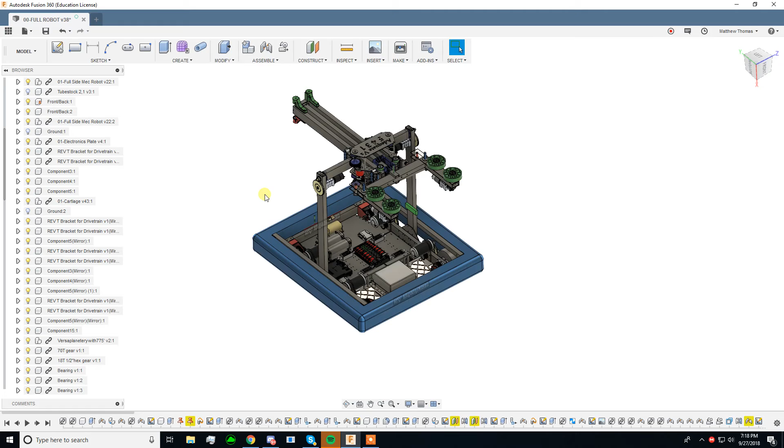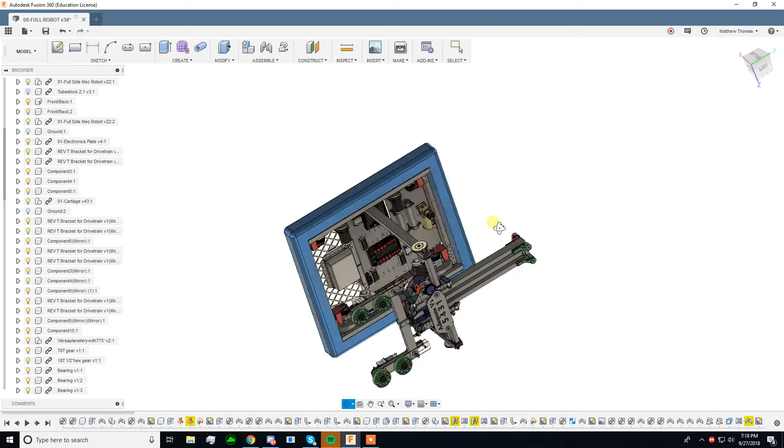This is another update video, a pretty big update video. Today is September 27th, 2018, and today we hit a milestone. Adequate V2 is officially done with build and electronics and was handed off to programming, I think like 45 minutes before the practice ended, something like that. Maybe it was less, I don't know. I'm bad at times. But today was a huge day.

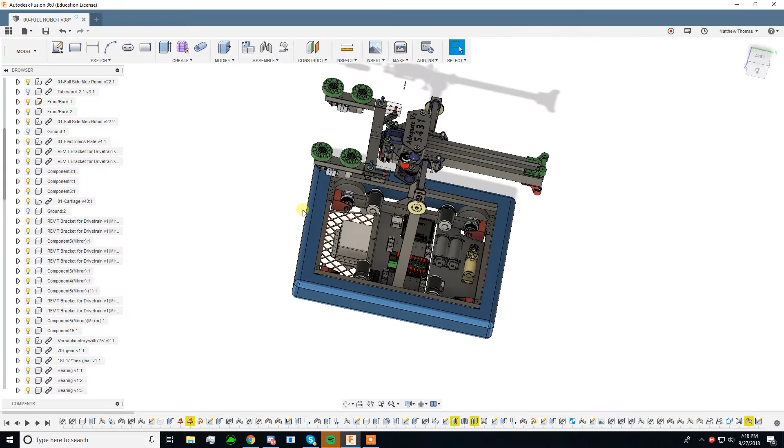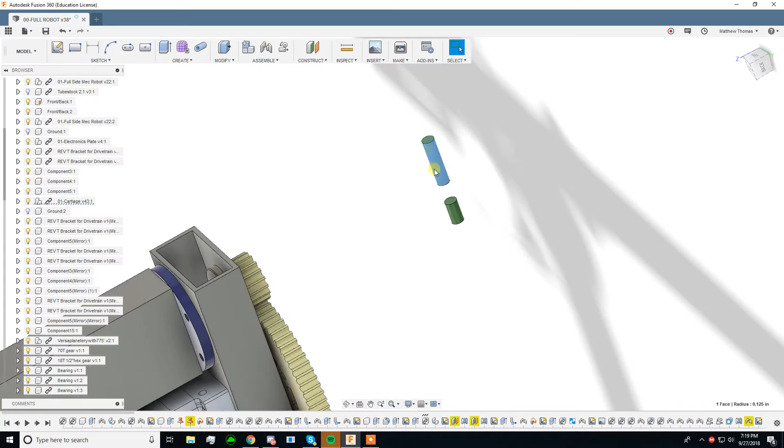Surprisingly, during the beginning of the actual practice, I thought we were being not very productive at all. But turns out I guess we were being a little bit productive. But we have the robot wired up. The wiring looks decent - I won't say it looks good, but it looks decent. In the time allotted, programming only got one of the motors to run. But it's a start, I guess.

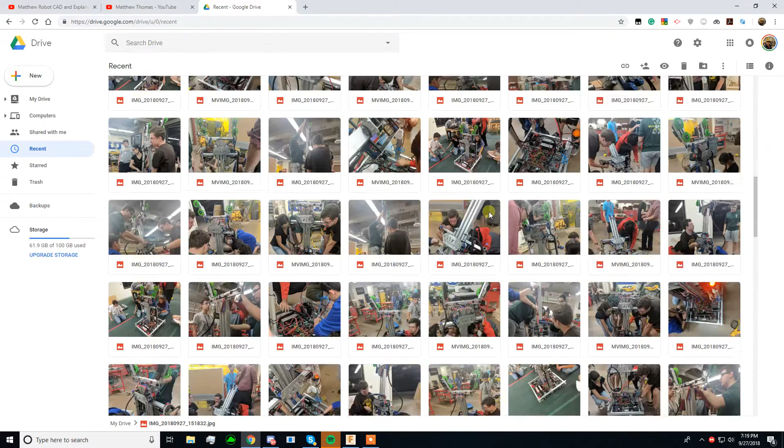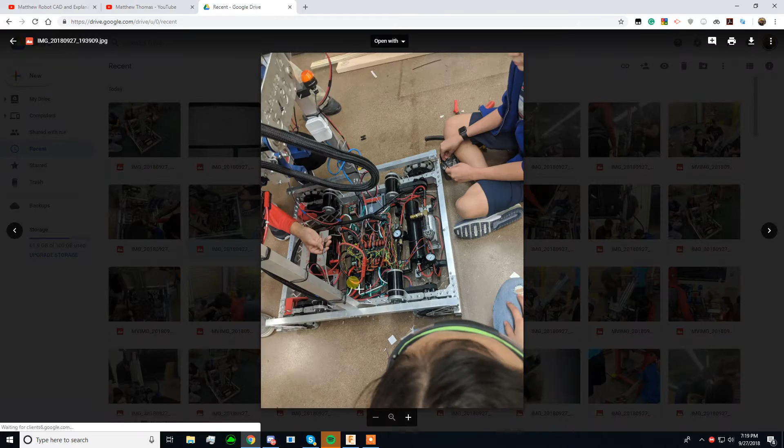Yeah, let's take a look at some of the pictures. Can't tell already, I'm pretty happy. Today was nice. So first thing we did when we got there is we drilled more holes for the battery panel, this panel right here. It didn't take that long. Then he used rivets to secure it in - that was really quick. Pretty nice.

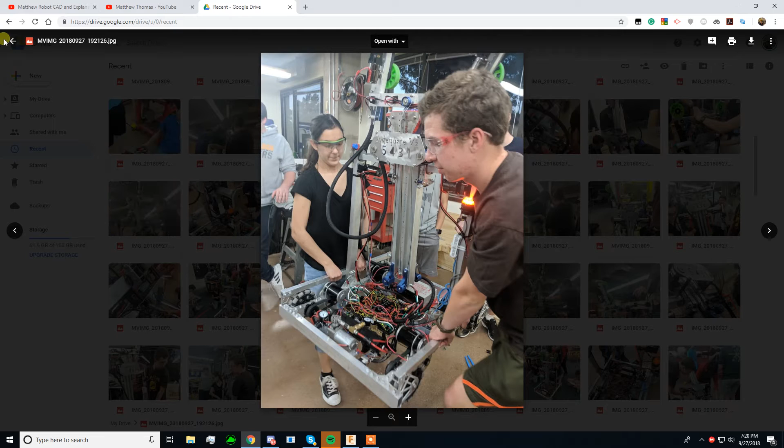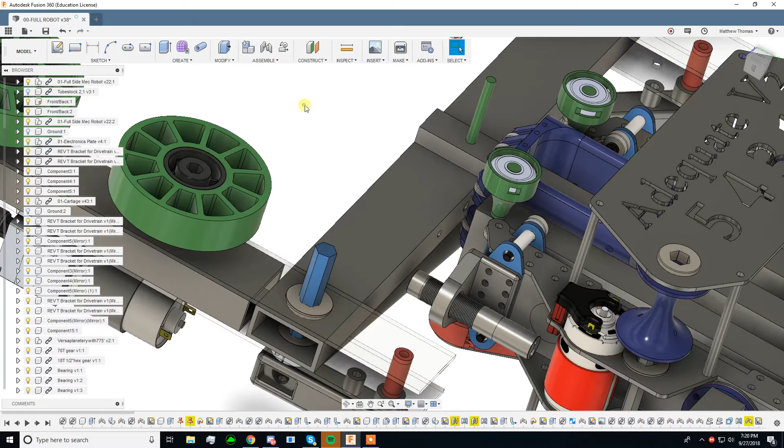After that, what did we do? Oh, the proximity switch - Natalia flipped it. I'm not sure if we have a good picture of that, but basically there it is. It's a switch that tells the elevator when it's down all the way, so we don't retract into itself and break everything. So that's pretty good that we have it on there. It's this thing right here, or this thing in the CAD. It was flipped the wrong direction, so we put that in the right direction, and we got that wired up. We haven't tested it yet, but it seems like it should work.

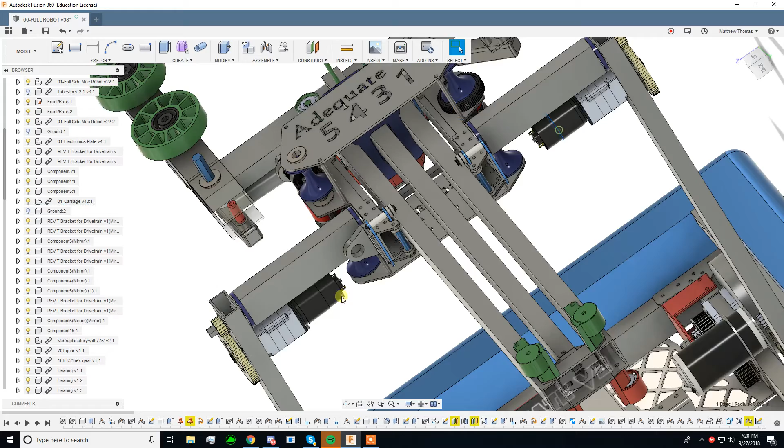Let's see what else we did. We installed the huge cable that needs to run this thing. We got the cables to run these two motors done. We have the cables to run these motors. We got everything wired in, including the pneumatics. Everything is wired - the wires probably still need some more cable management, but at least they're out of the drivetrain motors, which is the important thing.

Here's the actual robot on the field. I'm not sure if we got any pictures of it running - probably not because we only had one. Oh yeah, that's an interesting point - when the programmers launched it, only one of the motors was running. I'm pretty sure it's a programming or electrical issue, not a build issue. But the robot was still able to move, and it was able to move pretty fast. Imagine that - with one motor we can still run the robot. It won't be able to drive anywhere anytime fast, but that's surprising. So let's see what we can do.

Not sure, we basically, today was just all electronics. And electronics takes a while. You want to do it right instead of doing it fast, and that's what I think we did today. You can see the big cable right here.

I kind of like the solution we ended up with. I haven't seen it get caught yet in the testing that we did. I'm sure there's a better way to do it, but for now it seems pretty good.

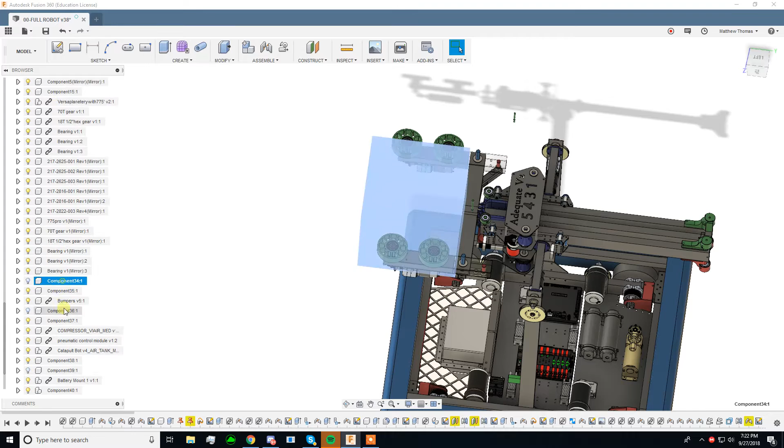I tested - and not saying that we would ever do this - but let me get my cube in here. There it is. So if we have a cube in the intake, what we can do is rotate like that, and not only in CAD but in real life, we can spin 360. We can go around and around and around and around.

And that would be possible, except we have these wires over here that are blocking us from doing that. So maybe after NTX, we could somehow figure out how to get the arm to rotate around and around with a cube. That would be super cool.

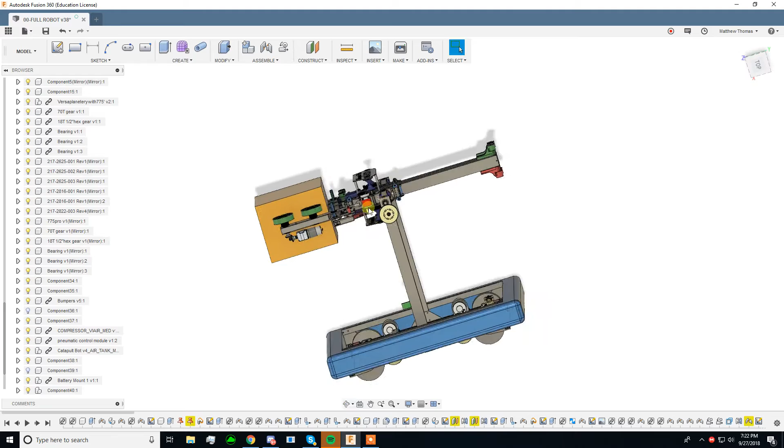So what we could do is go right here, take a block, go over here, then score the switch. Because right now we have to do here, and then we gotta flip all the way around to do that. It's not like that much difference, but actually that might even take longer for the switch, but it would be pretty cool.

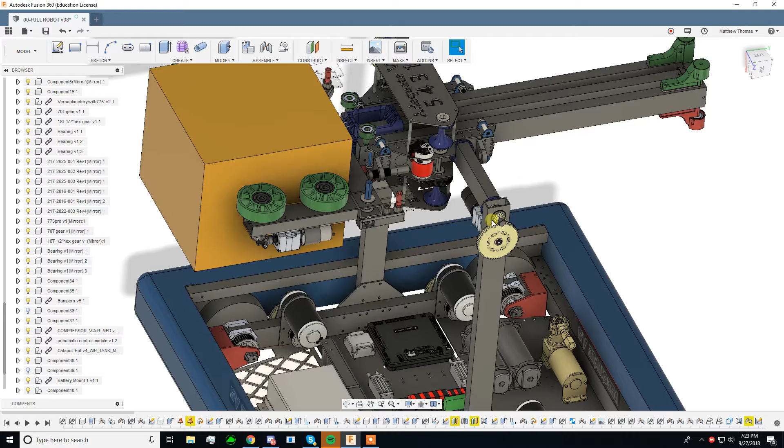But for that we need a slip ring and some other things, so it's probably not gonna be that much of a possibility. But yeah, I wanna spend this video also talking about how long it took to build a robot and these videos in general.

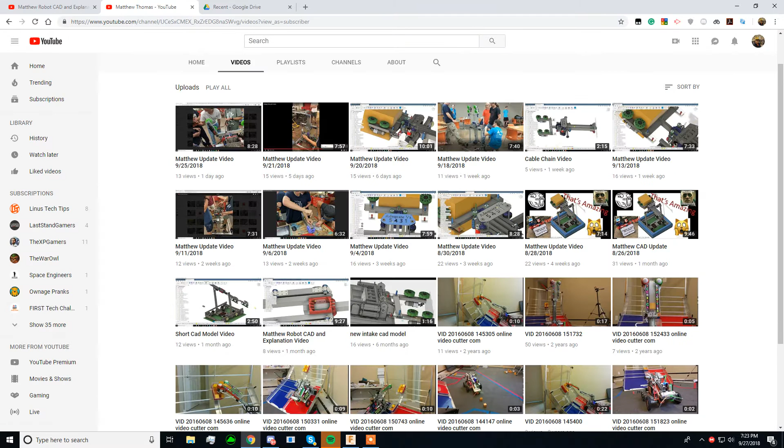So if we look back at my channel—sorry about that buzzing, that's Hangouts in the background.

We can see that I made 12, or I made 13 update videos. These two are the same. But yeah, I made 13 update videos, and each meeting was 2 hours. So that means we had 26 hours of actual build time. If you guys don't know, that's really fast.

But I didn't start the update videos until after we started CAD. So just to give you some idea, here's the first video to show what progress we had. This is what the CAD looked like.

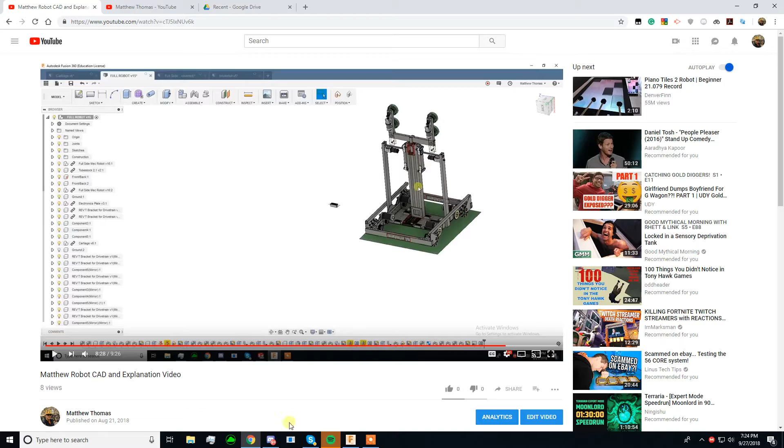None of the elevator stuff was on there at this point. I mean, you can see how much it looks a little bit different—like I added all the power and stuff. But yeah, let's see.

I think we have a good picture of where the robot was at. Maybe, hopefully—there it is. Okay, this is what the drivetrain looked like.

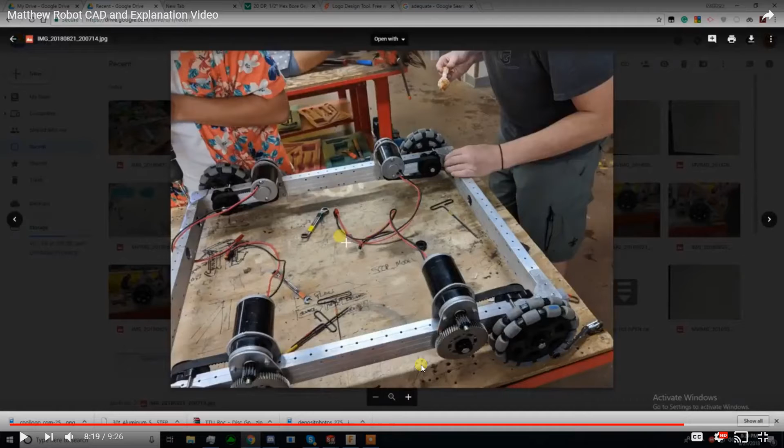This wasn't even done correctly. We actually redid all this because Jack didn't know. But you see these pieces of tube stock, they aren't even the right pieces. We took these pieces of tube stock off because it's supposed to go outside the frame instead of on the inside.

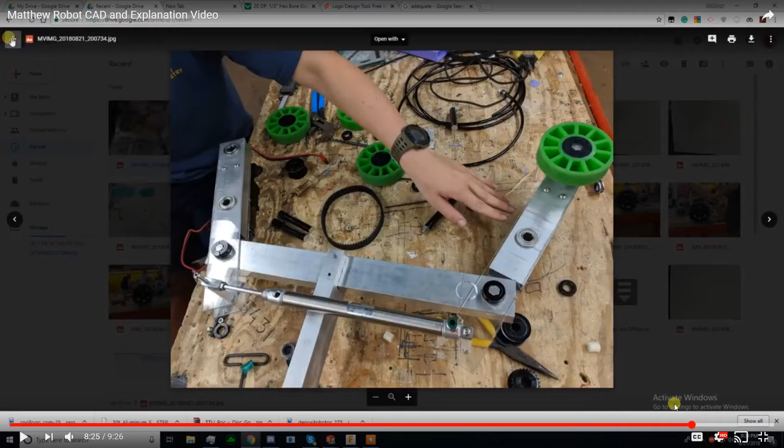So yeah, the only thing correct in this is the wheel assemblies. So all we had was the wheel assemblies done, and we had the intake kind of done. I think we ended up rebuilding it once because we didn't like it, but that's where we were at.

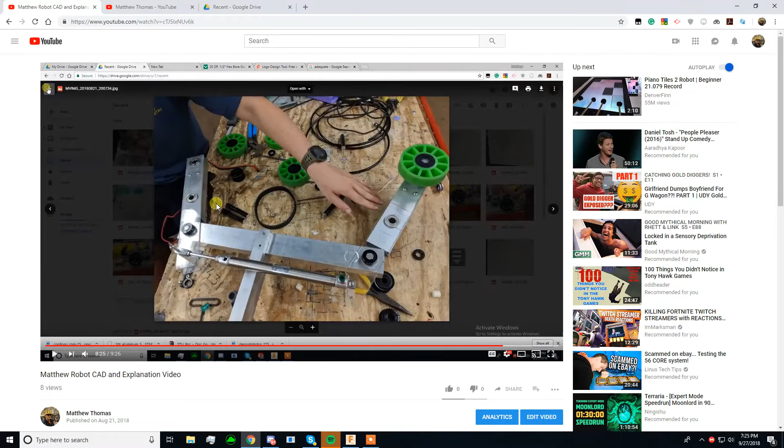So it's whatever. I think all this took like 2 meetings to do. So 26 hours for these videos, and I'll say 4 hours to get to this point. So 30 hours of build time total to build this robot. I think that's amazingly fast.

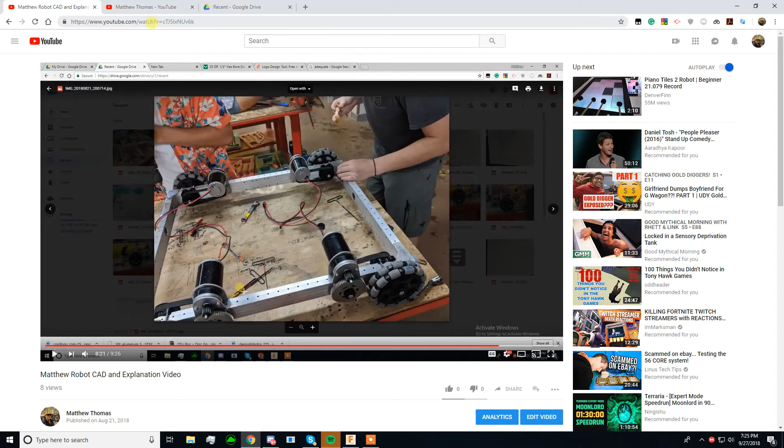I would like us to figure out how long it took us to build some other robots just to compare, because I think it's fast, but I'm not sure. Maybe it wasn't fast. But yeah, it seemed like it worked out pretty well.

Also pretty happy about the videos in general. I think that we should continue them throughout the season and the off season. It gets a lot more people engaged and asking more questions.

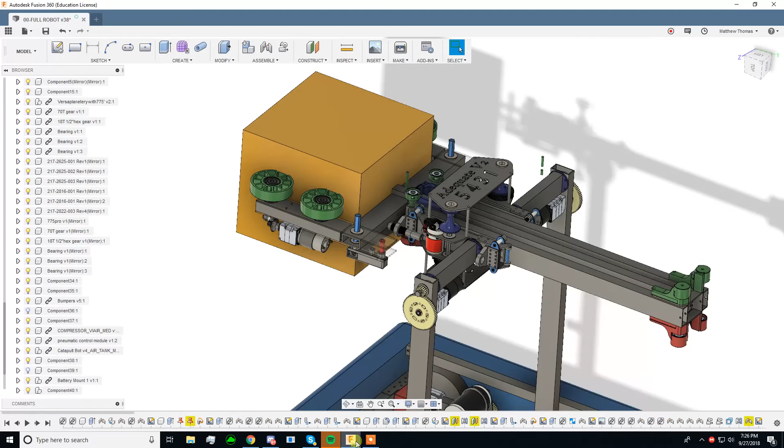And yeah, we have a practice tomorrow. We're gonna focus all on programming. Build is gonna build some bumpers. We're gonna get the encoder mounted.

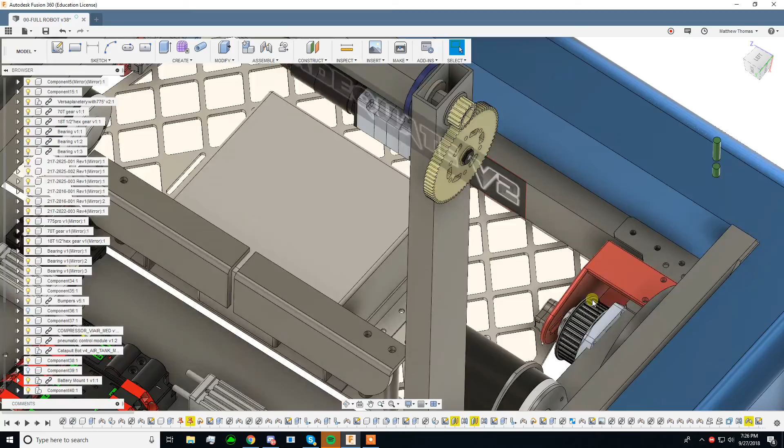Hopefully, maybe not—we might do that on Tuesday because I think I'm gonna redesign this thing since it's a little bit of a pain to put on the encoder. Because you have to access those two. So I might redesign it where it's like a slotted thing, if you understand that. I don't know.